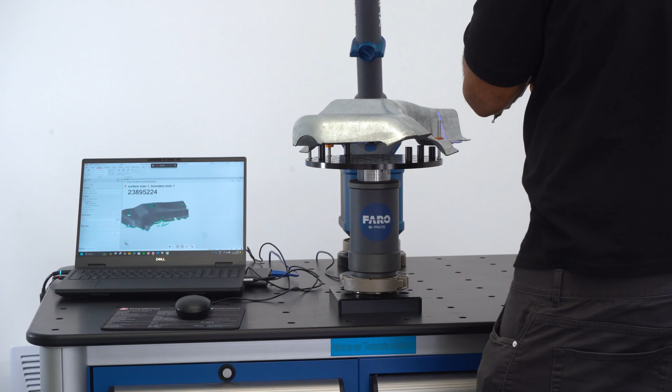In today's webinar, I'm going to be discussing some sheet metal inspection techniques. We're going to be covering some tips and tricks for you to optimize your inspection process, and we're going to have a look at solving some issues you may be having, such as the part being flexible, the thinness of the material, and feature extraction difficulty.

The hardware we'll be using today is the Faro Quantum Max. This arm is equipped with a probe and is also equipped with a laser line scanner. This allows you to probe and scan your part at the same time.

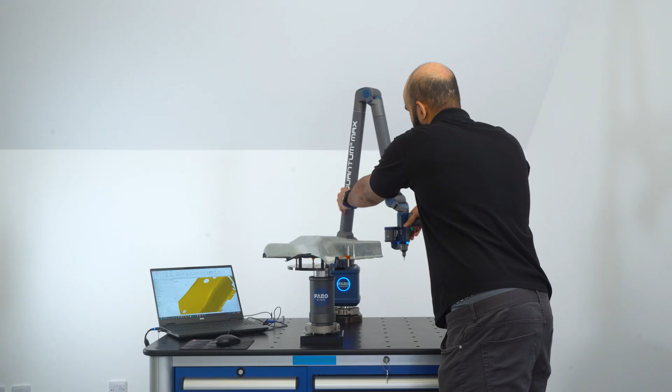Also today we have the addition of the Faro 8-axis. It effectively acts as an 8th axis of the arm, allowing you to spin the part in real time and inspect your parts quicker. This means you don't have to move your device or move the parts.

Right, so let's get into actually scanning our part. One of the issues raised was around part flexibility. With sheet metal and other thin material parts, you'll have the issue of part flexing if you probe it, which can cause inaccurate measurements and potentially an incorrect result.

With PolyWorks, we can actually do a boundary scan, and what this will do is pick up the sharp edge of the scan. Normally when you scan, you'll get a jaggedy edge, but when you use a boundary scan, you'll get a nice point cloud around the edge, which allows you to create features such as slots, circles, anything 2D or curve based really.

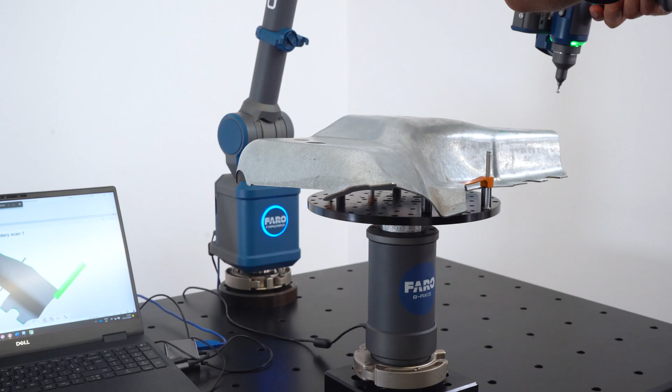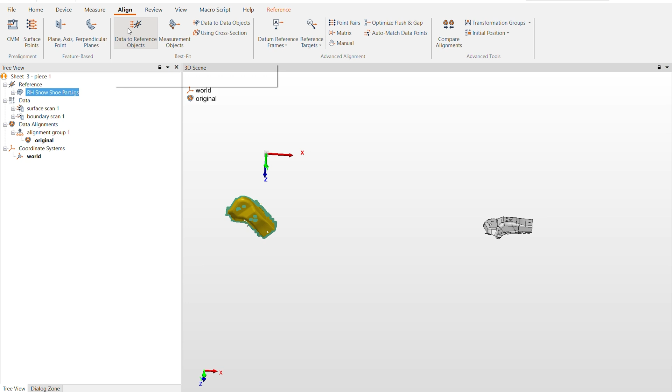So as you can see here, we have our scan with the boundary data, and we've also got our CAD. First of all, what we're going to need to do is an alignment. Initially we will click on the align tab here, and we will do a data-to-reference-object alignment. So this is essentially your best fit.

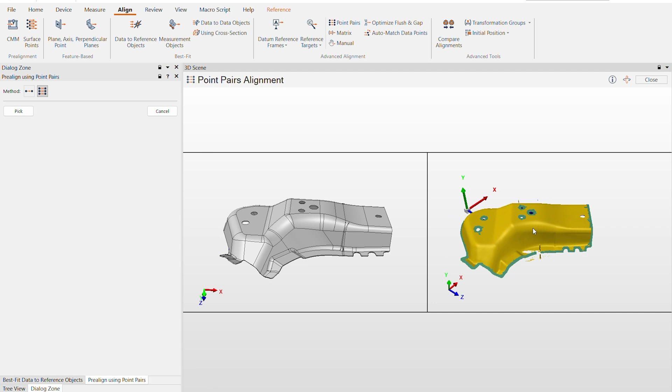So we'll firstly go on here. It'll be a pre-alignment, and let's use the point pairs option. So we'll just start that, so we get them both in line first. Essentially what we're trying to do here is pick the same points on each part, so it's a guidance for the software to know where it is.

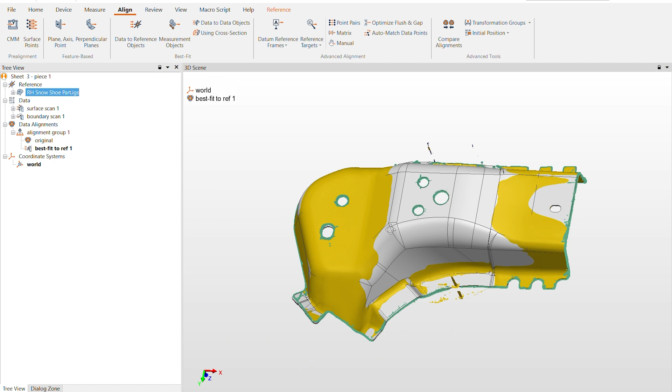So once we do that, then what we do is press align, and our parts are aligned by best fit. However, if we did want to do another alignment, for example on sheet metal, you'll notice...

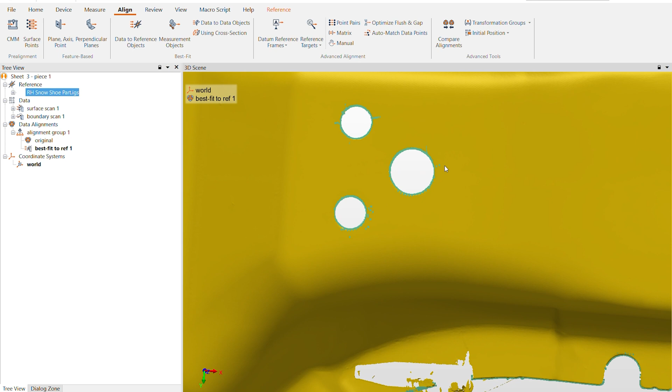Sometimes your data on a scanned part may not be the best, especially for holes. So if I show you this now on our boundary, we've got a nice clear defined edge. So for our customers out there who are using say sheet metal or carbon fiber, you may have these scenarios where you have a sharp edge which needs to be picked up.

As you can see here, what we're going to do is extract this feature. Firstly, we're going to create the features on our reference. So we're just going to make our reference visible again by middle mouse clicking, and we're going to do an alignment based on some features here.

Firstly, we click on the Home tab. If we have a look here, you'll now see all your feature creations moved up to here - this is new for 2024. So we're just going to click on the plane, and we're going to pick on our CAD model. Let's firstly do that here.

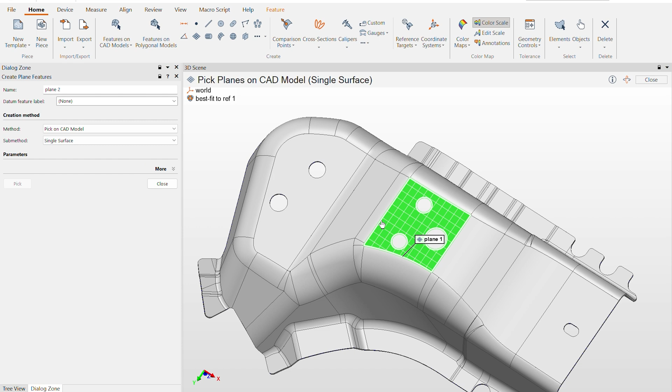Then, for example, we want a line between the holes, and one of our holes to be a point - so a plane-line-point alignment. What we're going to do is firstly click on circle and pick on CAD, next one over there. So now we've got a few features there.

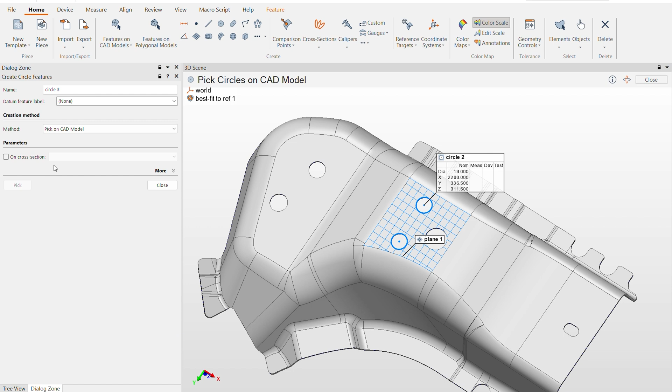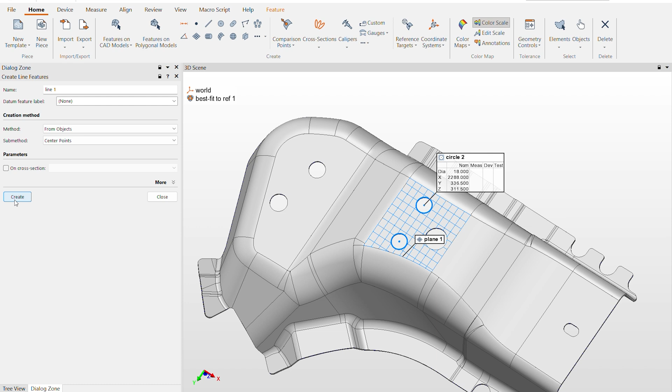New in 2024, what we can also do is select our features, and we can create features directly from the tree. So for example, if I wanted to create a line from there we can. We're just going to construct a line from object center points, and it even defaults straight to what we wanted. So if I press create, you'll now see a line. So we've created our features on the CAD, however, we haven't extracted them.

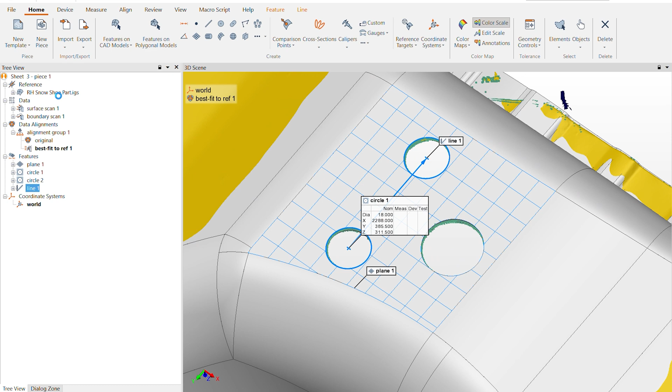I'm just going to show you some of the things you can now do with boundary. So if I make my data visible, you'll see we have our boundary data here. Let me just make the reference visible so it's a bit easier to see. You'll see there we've got our green points, which is a sharp edge, and we've got our surface data. So you can use both.

So these haven't been measured yet. So what we're going to do is extract them. We'll right click on plane one, go to our properties, and we'll go to a measurement tab and click on extract.

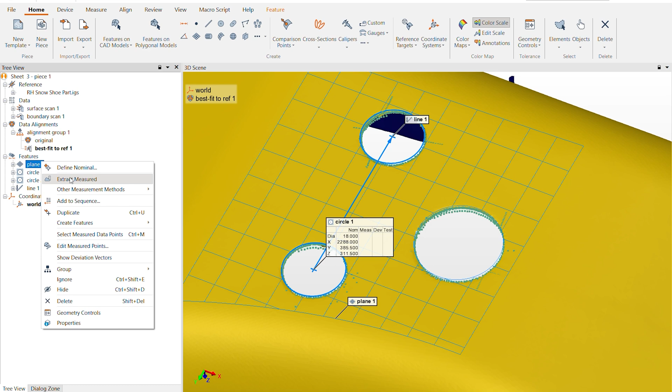Most of these settings will be okay in this instance, we don't need to change them. What we may change, however, is boundary exclusion, just to account for the bend radiuses within the part. So if we do change that to 2, for example, that will try and exclude the outside. We're quite happy with all the settings here. So if I press apply, right click and extract measured, you'll now see a measured component is there.

Now for the main part of what we're going to be talking about, say for example circles, we're going to extract them. So with curve-based features such as a circle, we're going to need to do some things differently on extraction. I'm just going to show you the scenario we have here first of all.

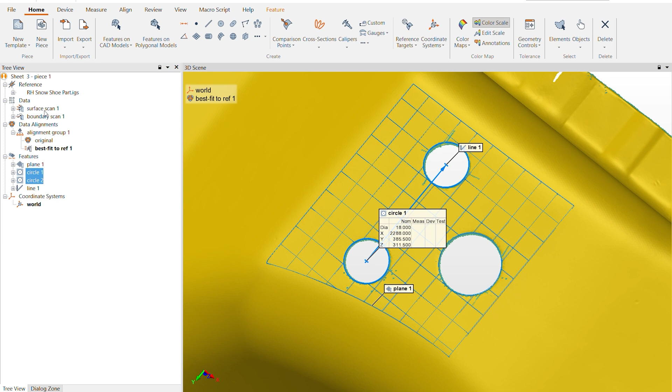Sometimes when you have surface data, your edges aren't great, and this can often lead to not the best measurements and may also affect your results. As you can see, it looks quite jaggedy. It's not the best radius there.

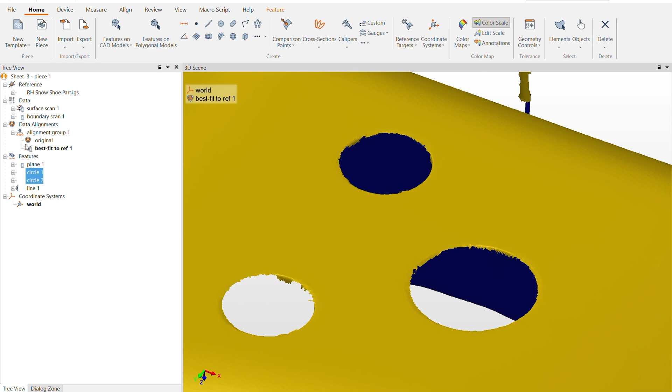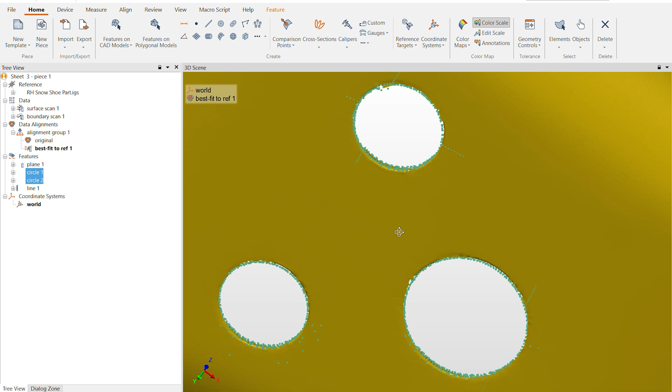So if I make my boundary scan visible again, you'll see now it's captured a nice sharp edge of the part. For your sheet metal applications, this would be quite useful, as your parts may not really have any depth, so you can't really create a cylinder. So what do you do? You'd have to create a circle. This really allows you to exploit PolyWorks to its best if you use these settings.

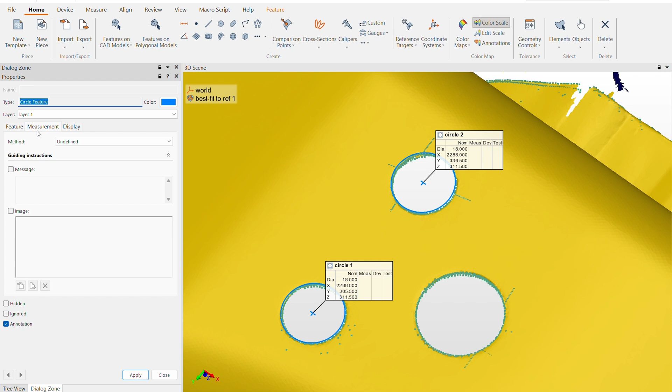So this is the boundary scan we scanned earlier. I'm just going to make these visible, and I'm going to highlight them both by pressing Control and clicking, and then go into the properties. In here, we're going to go to the second tab, which is the measurement tab. Then I'm going to go to extract, and you'll see we have a sub method here. This sub method is trimmed, which we're going to use, which suits the scenario.

This is essentially a scenario where you have sheet metal and your part has no depth whatsoever. So we've got a few options here. As our data object is a boundary, we'll use that. However, you can mix it up here, so you could have surface, boundary. It just changes the result however it extracts. So if we click on boundary here, it will only use the boundary data when we're creating that.

So let's have a look on the left of our screen. Here we have the parameter visualization. Essentially all that's happening here is it tells you how it's fitting. We don't actually need this super high, so we can say that is 4 millimeters, for example. We could probably say 1. It uses, 2, sorry. It essentially uses the boundary of the CAD feature that we've created, and it extracts a circle that way.

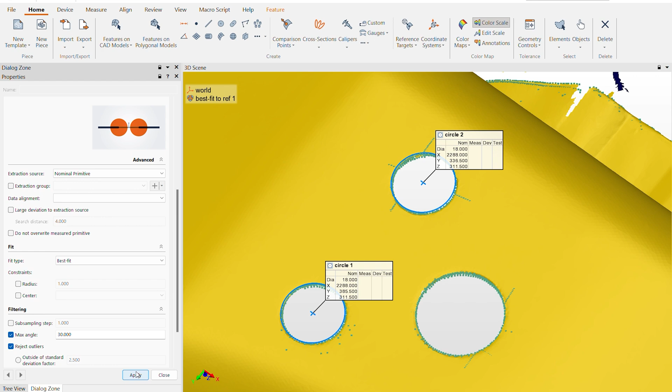So for constraining plane, we could extract a local plane, and these parameters are here, so it essentially extracts around it to create a local plane. However, all we're going to do is use the plane feature that already exists, so that is plane 1. We shouldn't really need to change any other settings here. So if we press apply, close, and extract measured, you'll see there we have a measured component now. The floating part is the CAD, so that's not been perfectly aligned from the best fit, but that's what's to be expected.

Also to note, if you did want to change the fit on these features, you could always go into properties and change your best fit min and max. It's up to you and your application.

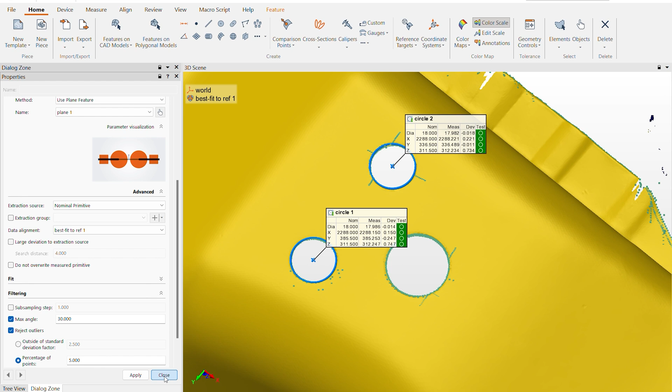So you'll now see we've got a measured line, we've got a plane. This essentially allows us to make a plane line point. So let's look at our tabs here again. If we click on Align, and then plane axis point, so we've got a plane, we've got an axis, and we've got a point in the form of one of the circles. We're just going to click on that.

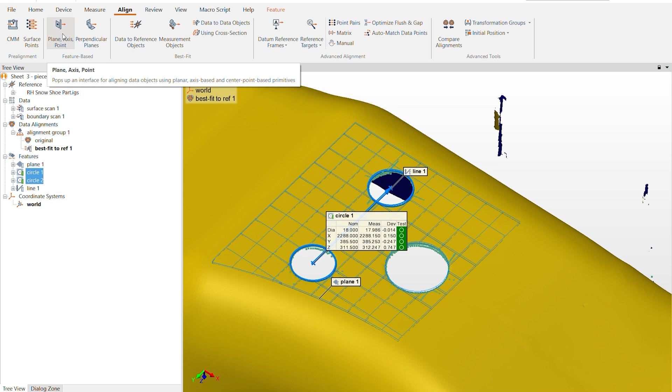Let's click on our source, which is plane one measured, and then our line as line measured. So essentially our source is a measured and our destination is a nominal. By default, it captures it as the matching feature. So as you can see, we've done that for we've got a plane, we've got an axis.

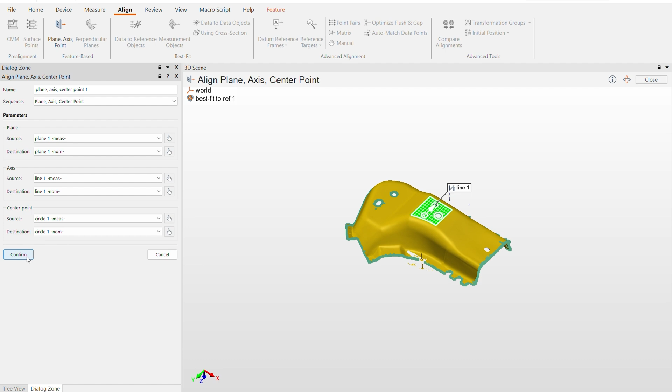Now let's get a center point, so we're going to say that's circle one measured. If we press confirm, we are now aligning plane axis center point. So you can see there the power of boundary scanning, for example. It does allow you to capture cleaner data in instances where you may struggle.

So let's just have a look at the difference in alignment just to prove to you guys that's worked. So reference, you can see it's fitted to the plane there. If I activate best fit to reference there, you'll see the difference. So that has shown there is difference in alignment.

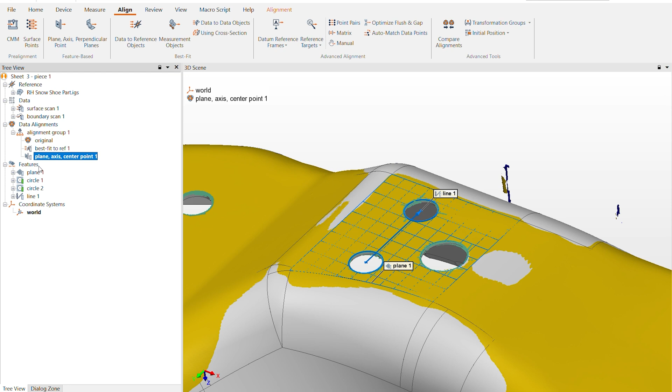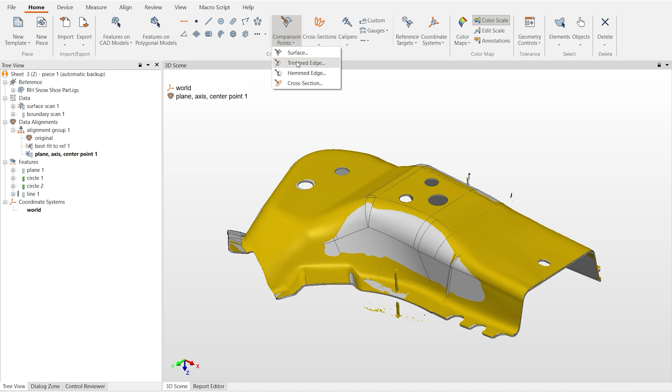In addition to the previous features I've shown you, I'm going to show you another feature which will be very useful for sheet metal parts. Firstly, we're going to click on the Home tab, and then go all the way across to comparison points, and click on the drop down, which will then show us trimmed edge points. After we've clicked on trimmed edge points, we're going to go on the method using anchor, and then we'll be able to click on the part, on the CAD edges, to anchor our sheet metal points.

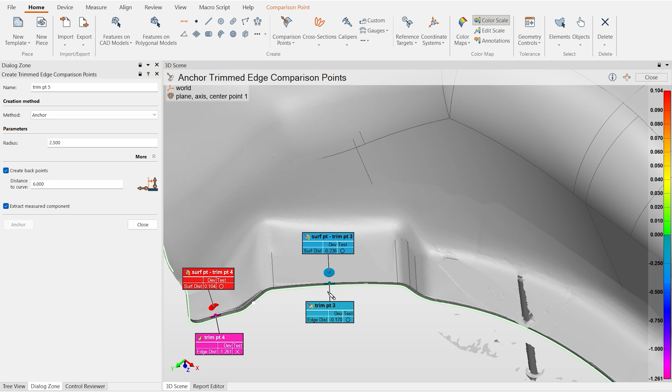So essentially what this is doing, it shows us a deviation of the sheet metal part on the edge and a back point going a bit further back just to show the surface data, how that's performing. So in order for this to work, you do need to make sure you have scan data in that specific area, otherwise it will not work. And it's a nice way to see how your sheet metal process has performed, in processes such as trimming and stamping where features have been made.

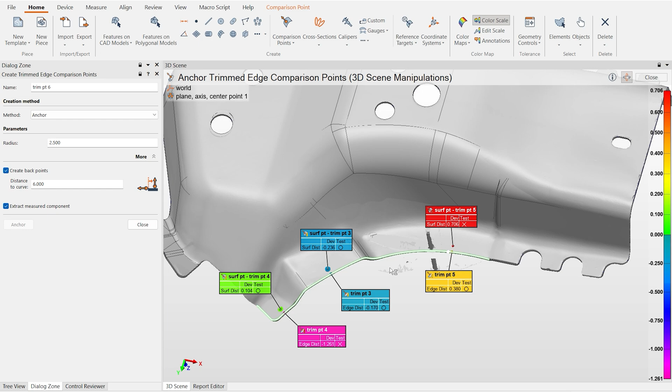Right, so what we're going to do now is we are going to probe a feature that we previously extracted on the last demonstration. We've already aligned our part using the plane axis center point alignment. And what we're going to do now is just probe a circle just to show you an option that can be used on thin material.

So in this instance, our part's actually quite rigid. I understand that sometimes you can have parts which are flexible, so this may not be suitable for them applications. But in an application where you got a part which is relatively rigid, you can still probe it. So in this instance, we will be using the thin material option.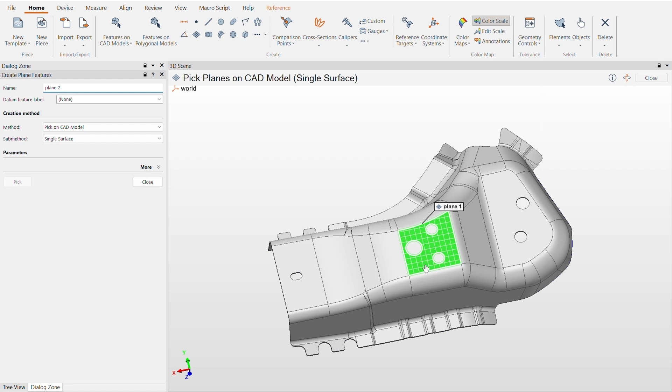So as you can see here, we're just going to select the features on our CAD model. All we're going to do is select our plane first, then our two circles, and we are going to quickly construct a line between the two circles. That'll be from objects, as you would any other feature that we constructed.

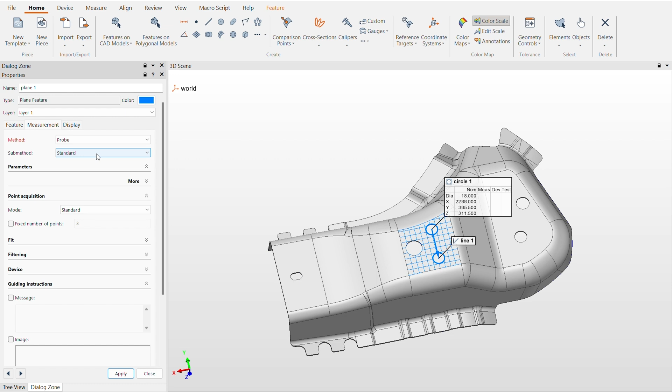So once we've got that, we've got our features that we need for alignment. We're firstly going to go into our properties and set our measurement parameters. So we're going to go on probe and then fix our number of points. This really just helps with our probing when we need to restrict the amount of points we want to take.

Now, once we probe things such as circles, we're going to see the following options pop up. The thin material option allows you to enhance your probing on thin materials where it might be difficult to actually get the probe to be level with the surface you're probing. It essentially improves the compensation that happens with the probe, as you have given it a material thickness, which is common in sheet metal. We'll set the material thickness to 1.5 millimeters.

And we'll use a constraining plane from plane 1. And we're also going to fix the number of points we're using here.

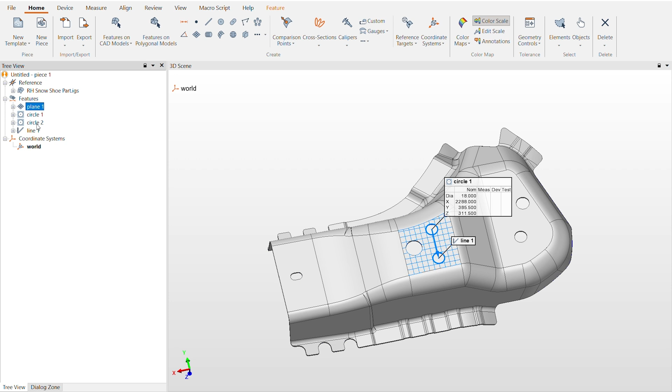So if we press close, now what we're going to do is highlight all of our features, right click, and probe. Once we click probe, we'll have to select the probing device from our list of probing devices. As you can see on our device tab on top, we're going to select the FARO Arm that we've been using the rest of this demonstration, and we are going to connect to the device.

So what we're going to do now is use the probe on the actual part. The part isn't aligned yet, however we're just probing where the device coordinates are. You'll see after it's aligned, it will all snap together. So at the moment we're just probing our plane.

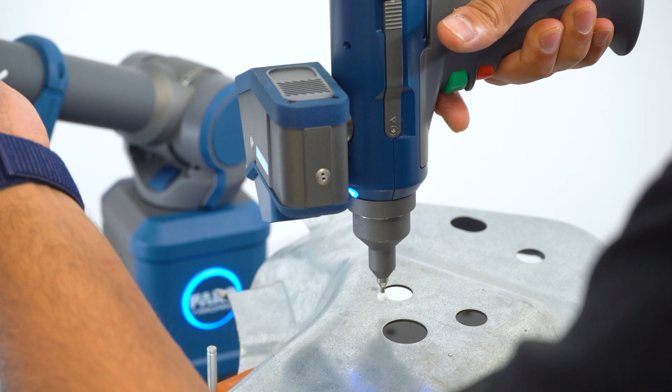And we're just going to compensate. And then we're going to probe our circles using the parameters we set earlier, using the 1.5 millimeter material thickness.

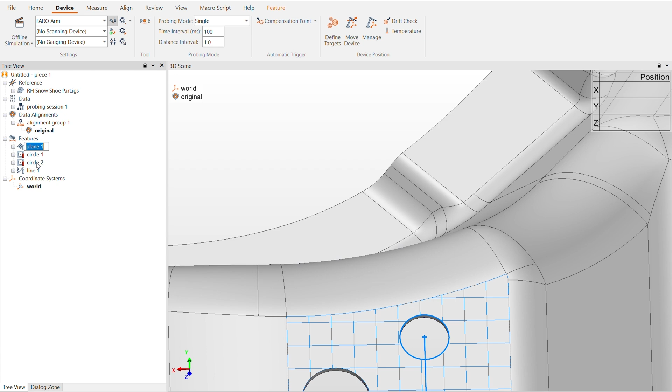So what we're going to do now is align via plane, axis, point. We're going to use plane, source plane 1 measured, and our destination is plane 1 nominal. And the same for the corresponding features with the axis and center point. We are now aligned our probe data with our CAD model.

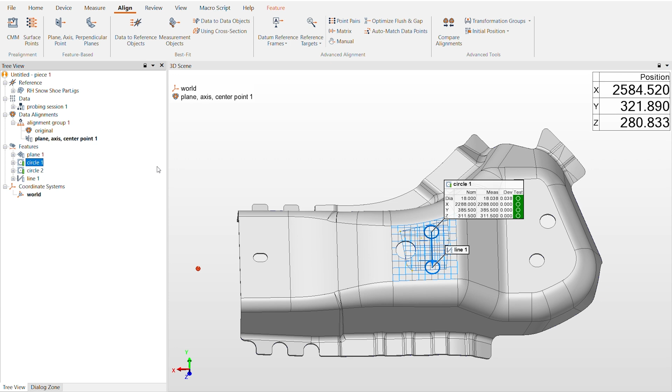As you can see, there are some optimizations there for sheet metal probing, which can be used for your projects as you see fit. As you can see, the probe is hovering above the part. That means we are aligned with the CAD in 3D space.

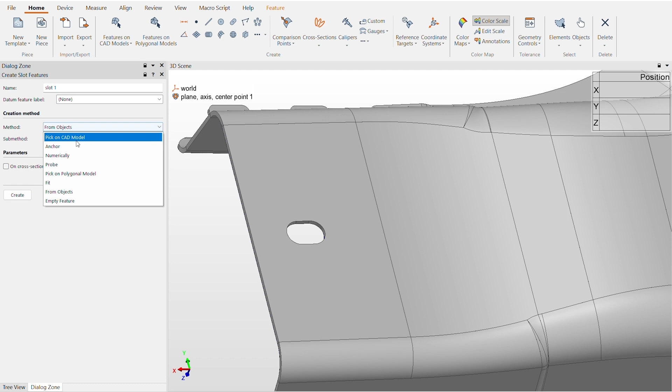So let's try another curve-based feature, such as a slot. What we're going to do is first select the slot on our CAD model. That is firstly clicking the slot on our home toolbar, and then we're going to pick on the CAD model. So as before, all we do is right click that, go onto our properties, and set our probing parameters.

So we can go on method, probe, and the important one here is thin material, and we're just going to change that to 1.5. As said before, this is how we can optimize our sheet metal probing parameters. So what we're going to do here is also have 5 points per arc on our slot, and have a constraining plane, as we don't have a constraining plane already probed, so we'll need to probe around the feature.

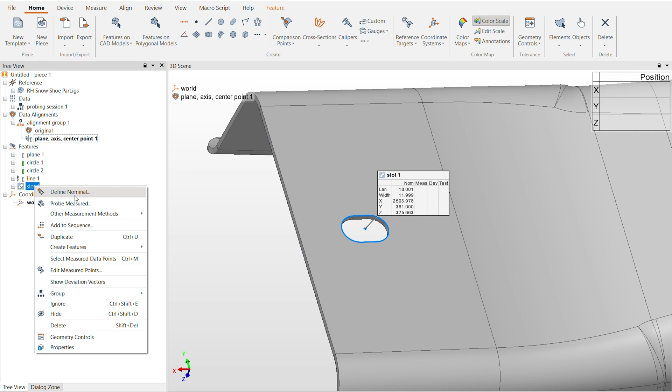If we press apply to that, we can now probe measured our slot. And as you can see, it's as easy as that. Just as we did before, we're just going to probe that feature. So you can see our probe knows where we are, and now PolyWorks will automatically zoom in on the feature.

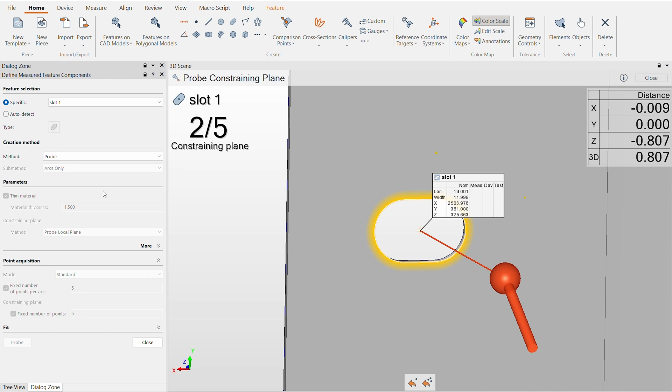So we're just going to probe around the feature first, and now constraining plane, and then we'll probe each side of the arc. As you can see there, we have our feature which is measured.

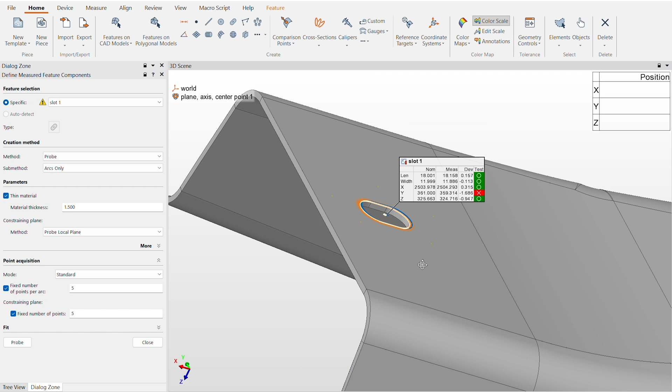And that is how easy it is to probe on sheet metal, and that is a few of the settings that you can optimize there. As you can see, it's quite a big deviation there, but as this is a demo part and the alignment we've used, this may be the reasons.